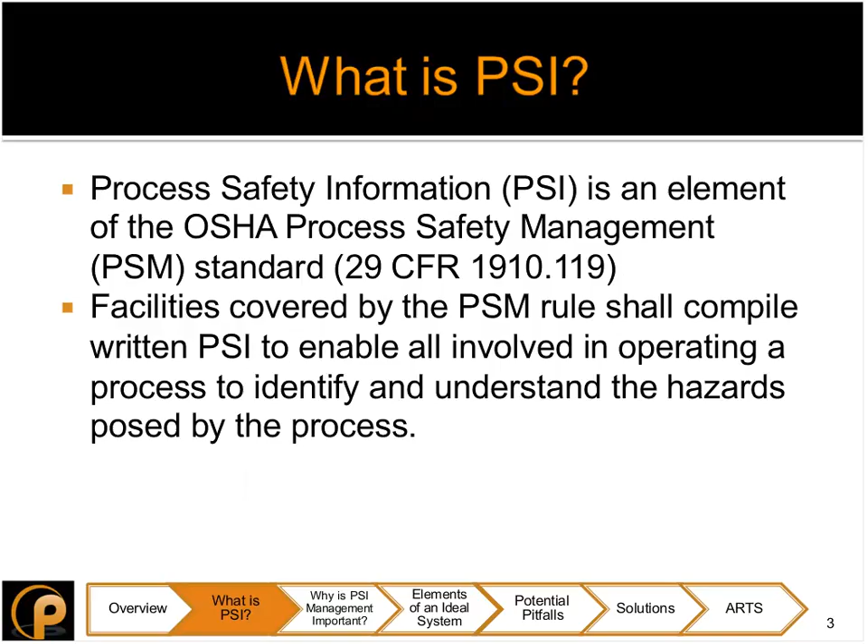What is PSI specifically? So this is how OSHA specifically defines PSI. It consists of information pertaining to the following. The first is the hazards of the chemicals used or produced by a process.

The second would be the information pertaining to the technology of that process. And the third would be the information pertaining to the equipment within the process. So we first consider what's in the process, then we would consider how does that process work, and then finally, what is the equipment that's facilitating that.

So for the hazardous chemicals, we consider things like toxicity information, permissible exposure limits, physical data, reactivity data, things that you would find on a safety data sheet, corrosivity data, thermal and chemical stability data, and the hazardous effects of the inadvertent mixing of these materials.

Then we consider the process technology. So that would be things like a block flow diagram, a simplified PFD or process flow diagram that shows how the process flows from beginning to end. The process chemistry, the maximum intended inventory. What do you keep at your facility? How much of it do you keep? This helps you determine, are you covered by the PSM standard?

It also considers the safe upper and lower limits for items like temperatures, pressures, flows, compositions, and an evaluation of the consequences of deviations, including those affecting the safety and health of employees. And then finally, we discuss the equipment. So we've looked at the chemicals, the technology, now the equipment.

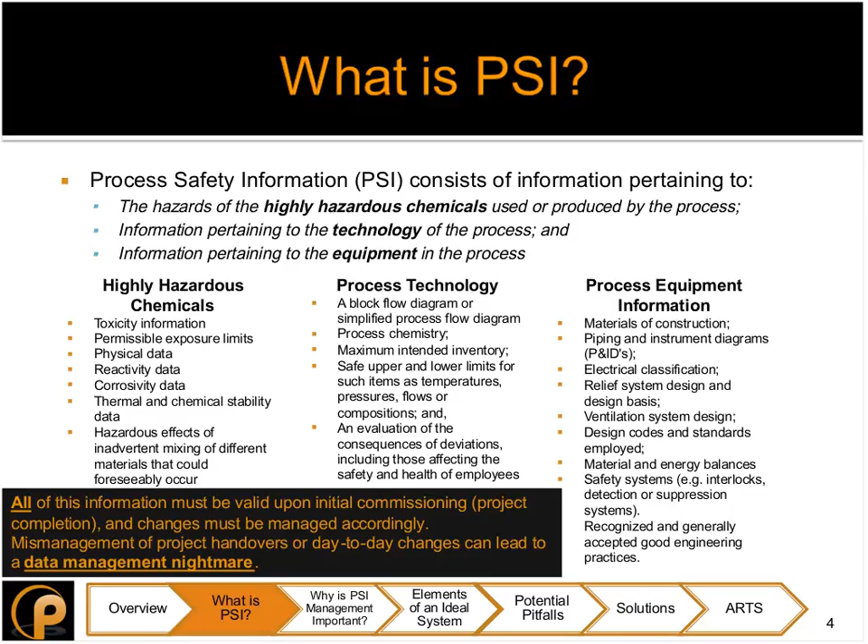So now we'll take a look at PSI as it pertains to a single piece of equipment. So we'll follow this piece of equipment from design to decommissioning, and we'll consider the PSI that's maintained in the data systems, but also in the documentation associated with this equipment. So of course, the beginning of a piece of equipment begins with design. So at that time, you've got systems that manage that design.

You've got design software that's going to contain information. You're going to do an initial process hazard analysis on that design. It's also going to contain some PSI. You may have a relief system database containing different points of PSI. In the documentation associated with that, you're going to have design calculations. You're going to have spec sheets, performance curves, vendor drawings, and so on.

From design, we move into commissioning. So once the design has been approved, we move to commission that piece of equipment. There's going to be not only more data systems, but more documentation associated with it. Of course, we're going to have to maintain that piece of equipment. So we're going to have some maintenance management software. Again, we're still going to continue to have this relief system database where we're maintaining this information now.

We're going to put that equipment on a P&ID. That P&ID is going to contain some data points for PSI. We're going to put it in an inspection database. That piece of equipment is likely going to be inspected for the rest of its life. We're also going to put it in some kind of document management system. So how are your P&IDs managed? How do you manage the documents associated with this equipment? And it's likely going to go on a plot plan for your facility.

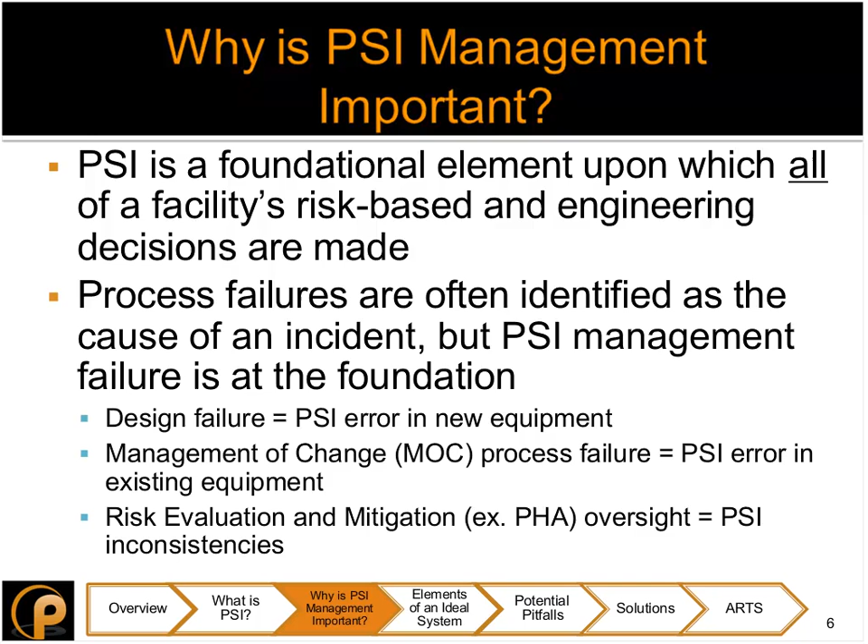To talk about changes in particular, PSI changes must be managed in conjunction with process changes at a facility. So we've hit on this, but let's consider a new pressure vessel. And let's think about all the elements of PSI that could potentially be affected by the addition of a pressure vessel. The highly hazardous chemicals involved in that. A block flow diagram, or PFD, right? Process chemistry, maximum intended inventory, what's going in this vessel. The safe upper and lower limits for temperatures, pressures, and so on. All of these things have to be considered when adding a new vessel.

The materials of construction, right? We need to consider those. We need to document those. It's going to go on a P&ID. We need to consider the effects it has on an electrical classification and update our documentation accordingly. And we need to consider the relief systems for that pressure vessel. It's no doubt going to have other equipment associated with it, maybe a PSV is associated with it. We've got design and design bases that go into that.

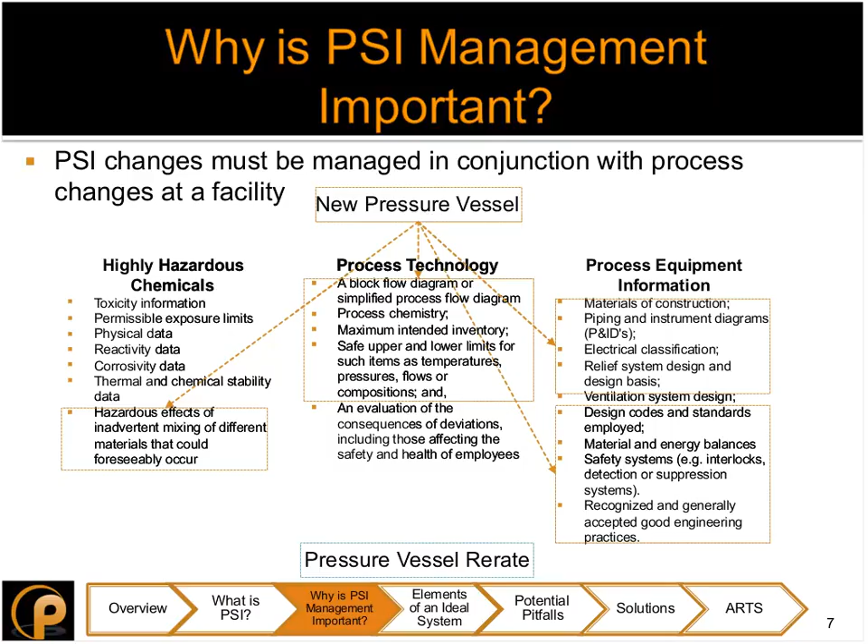So that considers a new vessel, but what about a change, such as a re-rate? So now that we've got a new vessel, it may go through part of its life, and we need to modify it. We need to change it. It gets re-rated for one reason or another. Again, these same systems are going to be affected. We need to consider the changes that has on the PFD. We need to consider the changes that has on a P&ID. Also on the relief system design and the design basis. And the material and energy balances.

So you can see through the management of change process, it could be easy to miss one of these through all of this. Maybe we realized that it changed our P&ID, but we didn't think about the effects that that has on our PFD.

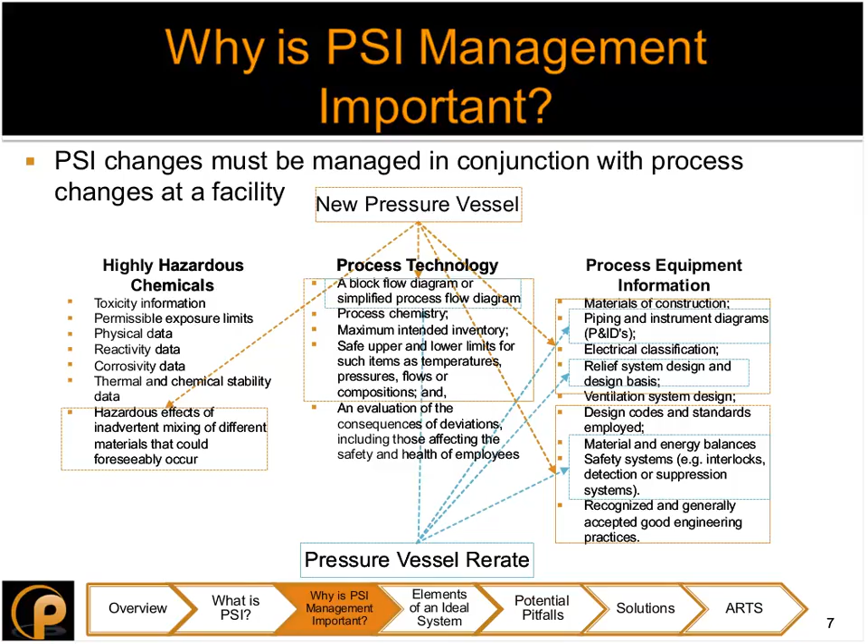So now that we've talked about what PSI is and why it's important, let's talk about the elements of an ideal system to manage that. Really, the two main elements would be consistency and accuracy. We all want accuracy, and we want it to be consistent across all of our systems. So how do we achieve those things?

We achieve consistency through integration. We achieve accuracy through traceability. So integration would mean things are stored and maintained in one location. Traceability would mean we can relate things back to some sort of reliable documentation to let us know that we're accurate. So let's talk about these specifically.

Consistency. Consistency would enable each department system to use the same PSI. This would mean calculations across the board would be based on the same data. We wouldn't have one group basing calculations on a set of data that maybe they maintain that's inconsistent with the set of data that the engineering department maintains. There would be no need to cross-reference systems if everything is consistent.

This would also enable each system to leverage other systems to fill in gaps. So if we know we have a really strong inspection data management system, do we leverage that to fill in the gaps that we have in our P&IDs?

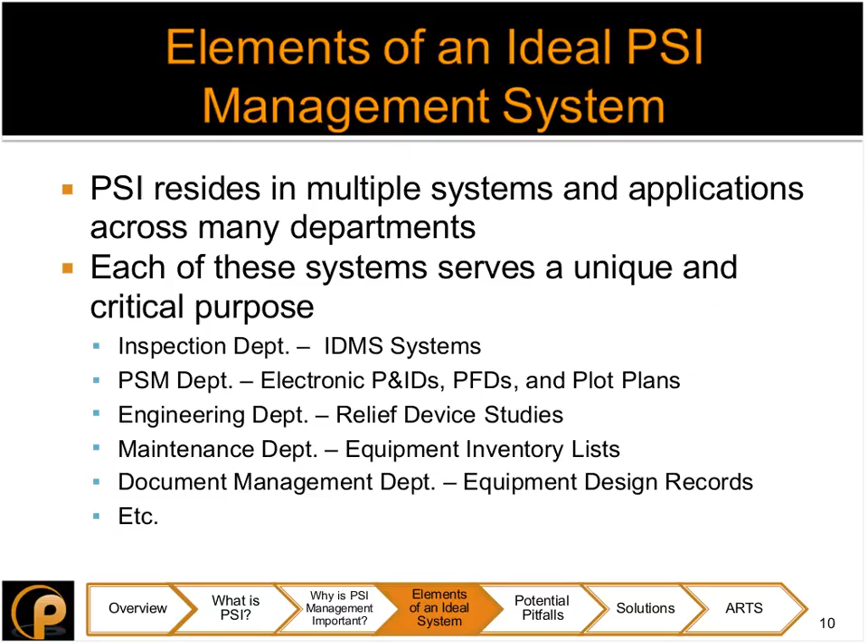So now let's talk about some pitfalls, right? We've looked at what an ideal system should look like. But now let's look at the reality of things and discuss some challenges, some pitfalls that come with how we manage our PSI. PSI resides in multiple systems and applications across many departments.

I'd challenge you to think about your own facility, as we talked about earlier. Where do you manage all of this information? Is it in a central location? Does one department manage it? Or is it in multiple applications? Do multiple departments manage that information?

For instance, you may have an inspection department that has a specific inspection data management system. You may have a PSM department that manages your P&IDs and PFDs and plot plans. An engineering department that has a separate database for doing relief device studies. A maintenance department that keeps equipment inventory lists for maintenance reasons in a separate database. And a document management department that keeps records, potentially separated from all of the data sources we just discussed.

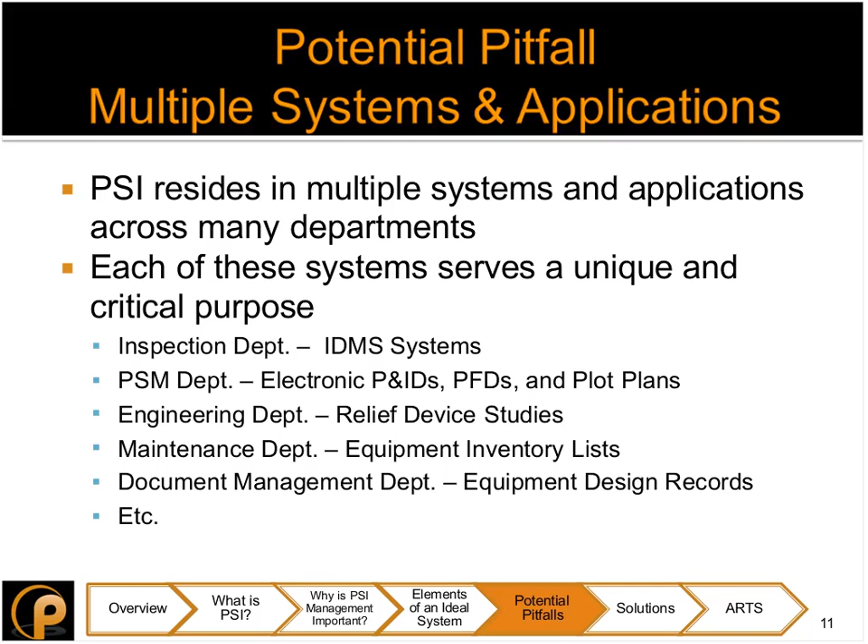Not only do we have different systems, we have different departments. And departments tend to manage and maintain PSI separately. Verified data and information in one system is rarely leveraged to improve other systems. So as we talked about, when we recognize deficiencies in one system, when we make those corrections, do we tie the other systems to that?

Do we make a change to our inspection database and realize we should check our P&IDs also? Should we check our PFDs to see if this information exists here? Or do we focus purely on our departmental responsibilities? If we don't, a number of redundant efforts could be made.

So you could have a huge inspection department effort to update their systems, and then a year later realize your P&IDs are out of shape and have a huge PSM or engineering effort to update your P&IDs. The key would be to recognize these by centralizing your data and only doing these efforts one time.

And again, documentation, which is the source of most PSI, is often maintained separately. So think about your document management systems. Is it maintained with your PSI? Can you get it all out in one location? Can you trace your PSI back to documents very easily?

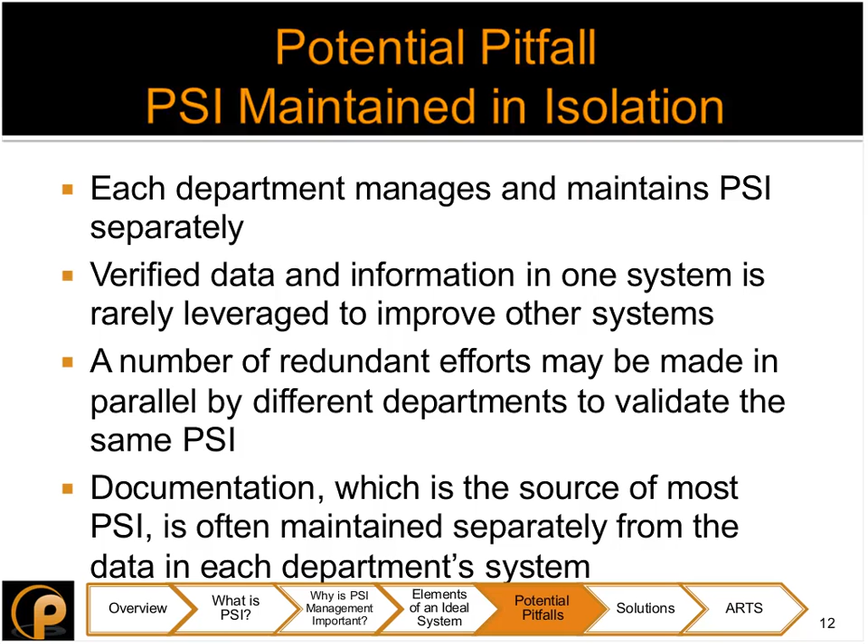And another challenge, whether we like it or not, is human error. Right? Employees are all fallible. Management of change process is not without room for error. This error could come from the improper evaluation by an MOC team of the effect of a change on a particular system. So you may have an evaluation team that recognizes a change will affect a P&ID, but they don't recognize that change will affect a PFD. Or they don't recognize that change affected your relief system software.

Even if you have a flawless team, right, as information goes into those systems, we still have the opportunity for error. Could it be a typo? Could a person see an MAWP of 150 and accidentally type in 120? This happens every day. And it could also be neglect or simple forgetfulness by a system administrator to complete an assignment.

So maybe you have a great MOC system and great MOC teams that assign the right things to the right people, and maybe sometimes an action item gets closed out by the wrong person and never gets tracked by the person it should have to put in the data. Maybe someone with good intentions puts something off till it falls off their radar and gets neglected.

All of these pitfalls and challenges can lead us to a lost confidence in the validity of our PSI. And when we start to lose confidence, we lose efficiency, we lose the ability to design correctly. So if you've ever asked these questions, how do I know every vessel exists in all the required systems? How do I know every vessel's MAWP and MAWT stored in each system is consistent and accurate? How do I know every PSV set pressure stored in each system is consistent and accurate?

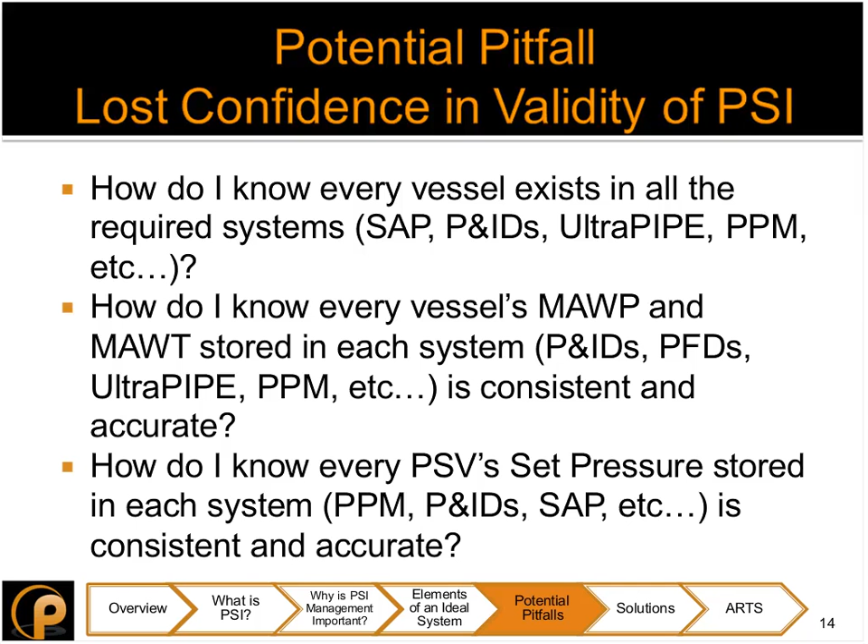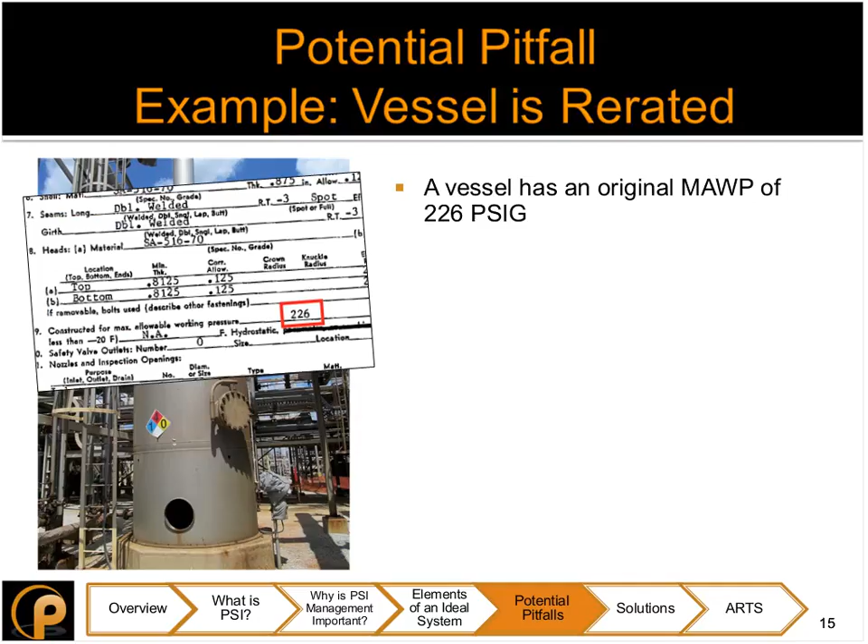An example of the pitfalls associated with managing PSI would be re-rating a vessel. So let's say a vessel has an original MAWP of 226. That vessel gets re-rated to 150. Inspection system gets updated. But the relief systems, for one reason or another, right, it could be any of the reasons we talked about to this point, does not get updated.

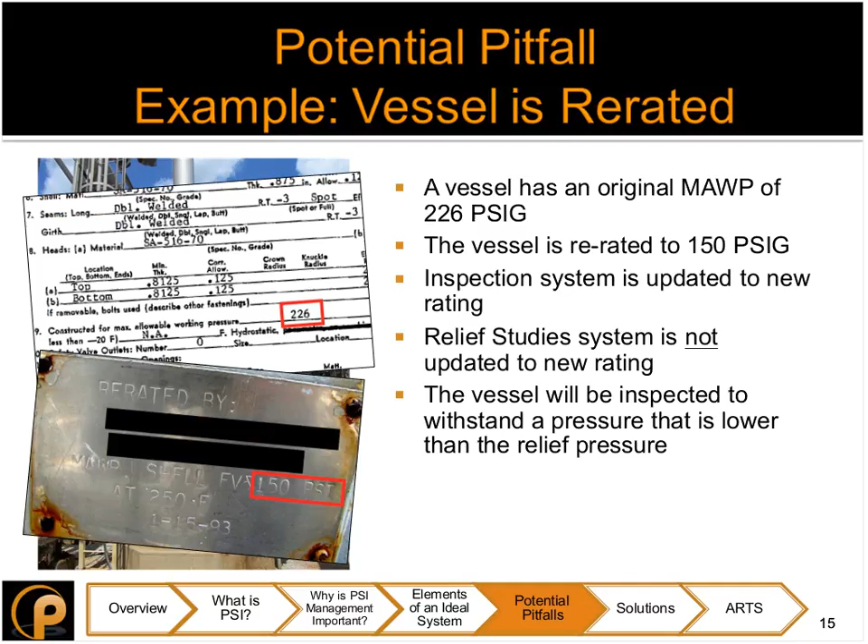Was it a failure in the MOC? Was it a failure by the administrator that was supposed to enter the data? Was it the MOC team? Who knows? It could be any of those things. So then the vessel is going to be inspected to withstand a pressure that is lower than the relief pressure. So PSI discrepancies can go unnoticed if there's not a process in place to connect and cross-check these values.

So now we get to the solutions. We've talked about what PSI is, why management of that PSI is important, what an ideal system would look like, the challenges associated with it. What are the solutions to those challenges? Well, we need to think about our information differently. We need to think about the interconnection between data, documents, and systems.

Data is validated and traceable through reliable documentation. Data systems contain data. Do they contain the documents as well? Are these separate systems? Is there the opportunity to combine these systems? Can we have our documentation available right with our data? Documents, again, are going to demonstrate the accuracy of your equipment data.

And your systems, when thinking about these things, improve PSI maintenance without changing our existing practices. Can we centralize things where we can still update the systems we've been updating, but can we view those systems in a central location that allows us to see, are we doing it consistently without drastically changing what we do?

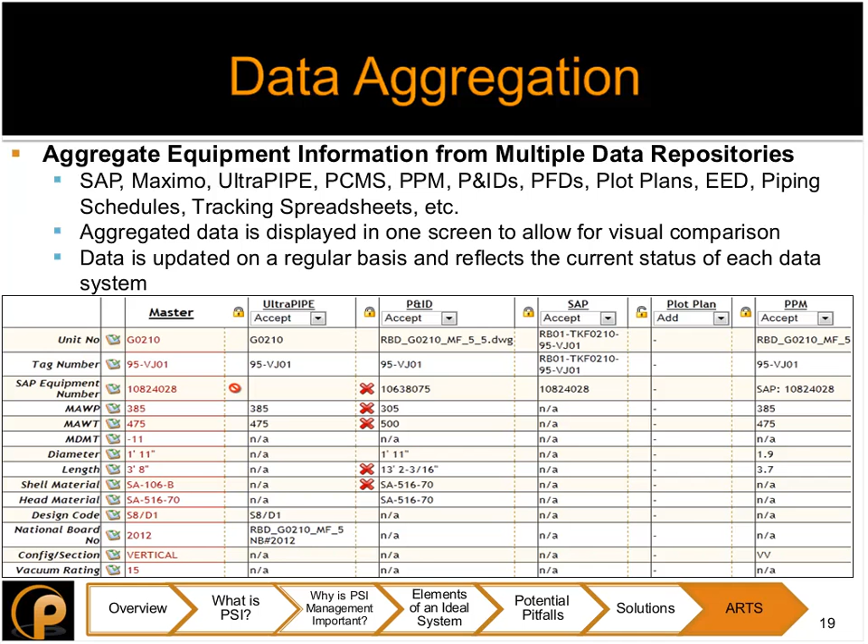And then you can do a data comparison. So you want to aggregate the data to make this possible. ARTS has the functionality to automatically identify some deficiencies, this would be missing records or data, and some discrepancies, so data that is different in one system than it is in another system.

Data can be transformed into a specific format to allow all data sources to be compared equally. So these are some things that are done on the back end, because in one system your data may be formatted one way and another system may be formatted another way. So all of these things make it easier when you pull it in to do some automatic comparisons.

So we talked about data aggregation and comparison. We also want to talk about documentation aggregation. So this is what allows us the traceability that we've been talking about this entire time. We aggregate our reliable documentation, so we are able to trace our data back to this documentation and call it validated. This documentation might include data reports, flow curves, nameplates, and so on.

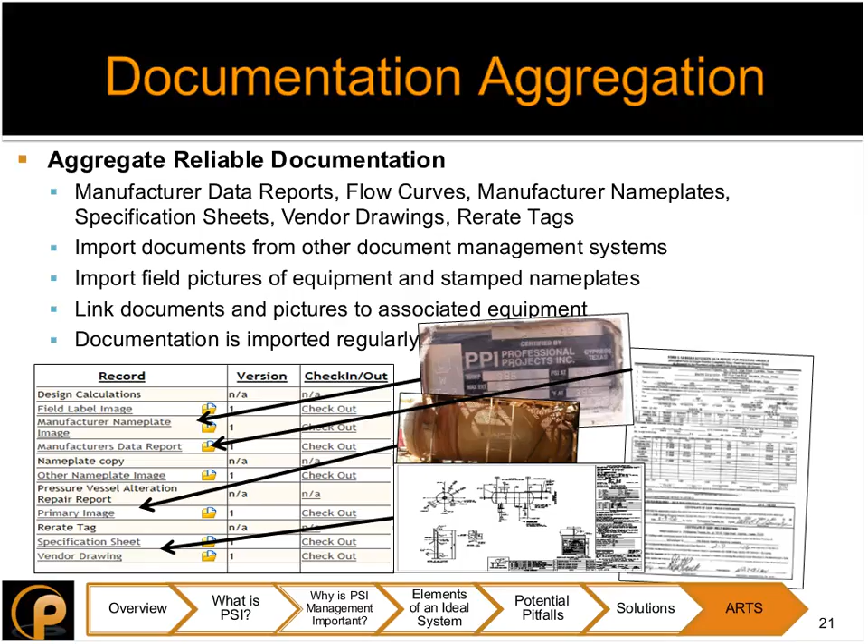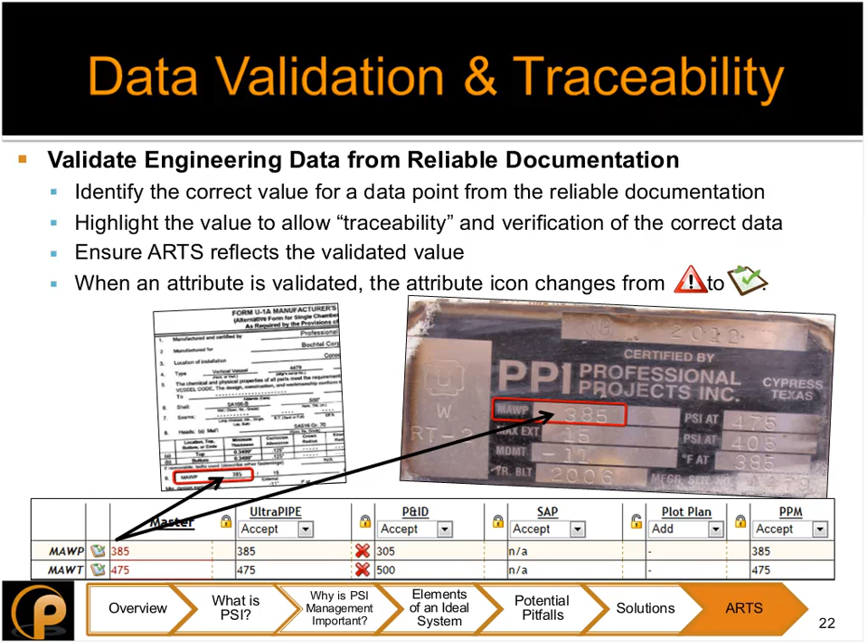And finally, tracking and reporting. So not only do we want to aggregate our data, we want to be able to validate our data, we want to be able to aggregate our documentation to do so, but we want to be able to track progress. So the tracking and reporting functions will allow you to track changes within each data repository. So the equipment itself is inert, but the plant as a whole is dynamic. As data sources update their data, add or remove equipment, discrepancies are created.

So as we manage our change, as we update one system and maybe not the other, these data sources are constantly changing. These reporting functions will allow you to identify trends. Are we constantly updating our P&IDs but missing our inspection documentation? Are we doing a real good job of updating our inspection stuff but we're not keeping our relief systems database up to date? By generating reports on a monthly or weekly basis, you're able to identify these trends.

These reports can include discrepancy reports that show you data points that don't match. They could be documentation reports. What do I have good documentation for, and what am I missing documentation for? Maybe you'll determine we've got really good documentation on our pressure vessels, but we historically didn't do a good job of maintaining documentation for PSVs. These reports will allow you to see that and allow you to think about where your site can improve specifically, maybe put together projects to improve those certain things.

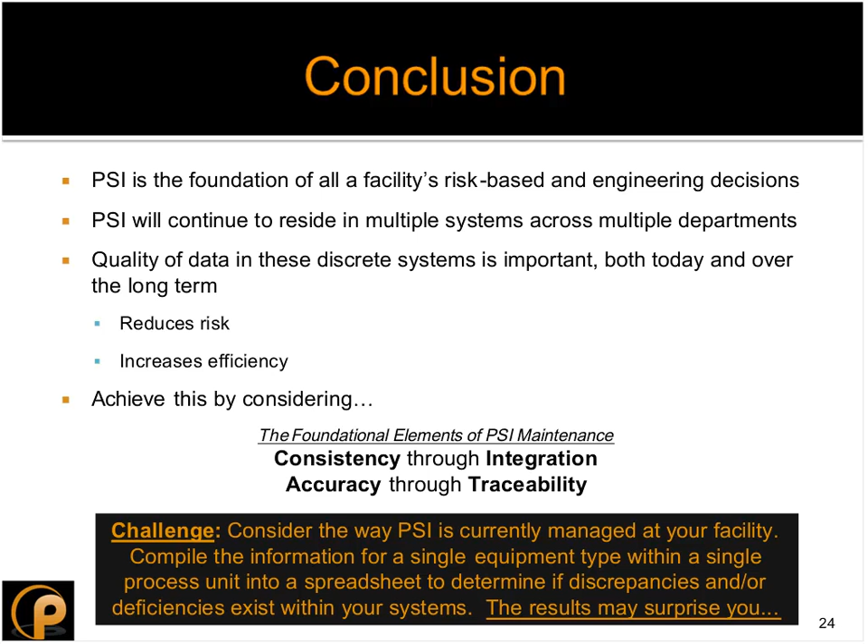Okay, thank you. How do you handle integration in a company that is not operating off the same platform? I'm sorry, could you repeat that? Yes. How do you handle integration in a company that is not operating off the same platform?

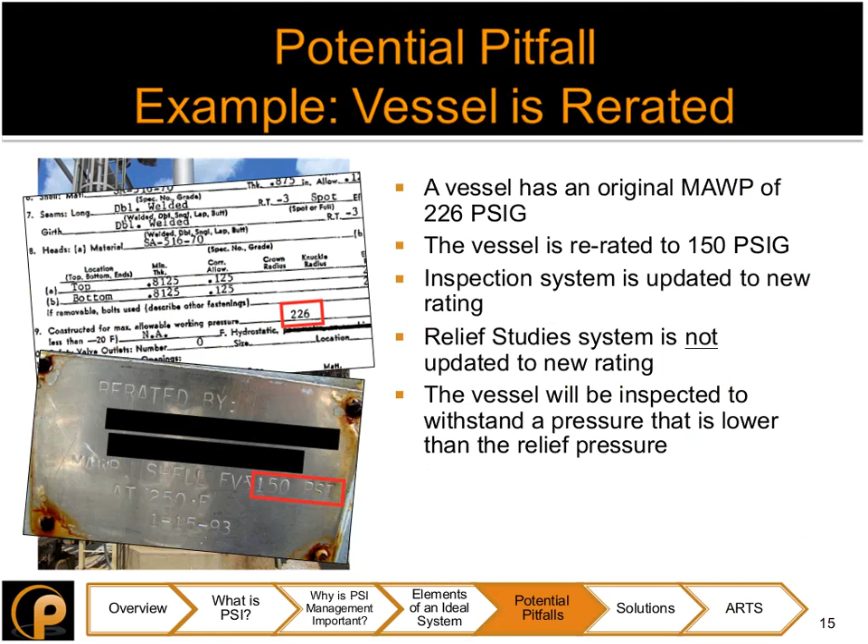I don't know that I still fully understand it, but I would say integration to me is aggregation of data, accessibility. I think all of those things we can make possible, whether it's electronically, whether it's physically. Integration really is just trying to achieve consistency by making sure that everyone in a company is able to see the same information in the same sort of way and make decisions based on the same information and knowing that that information is accurate.

Okay, thank you. For this ARTS system, is there an automated change log generated as this data is updated by any of the departments or connected systems? So within ARTS, you're able to download information from different systems as many times as you choose. So the reports that you can generate can show you things that changed since your last download. So when you generate reports based on downloading information, you're able to see information that has changed from this time to the next time. Okay, thank you.

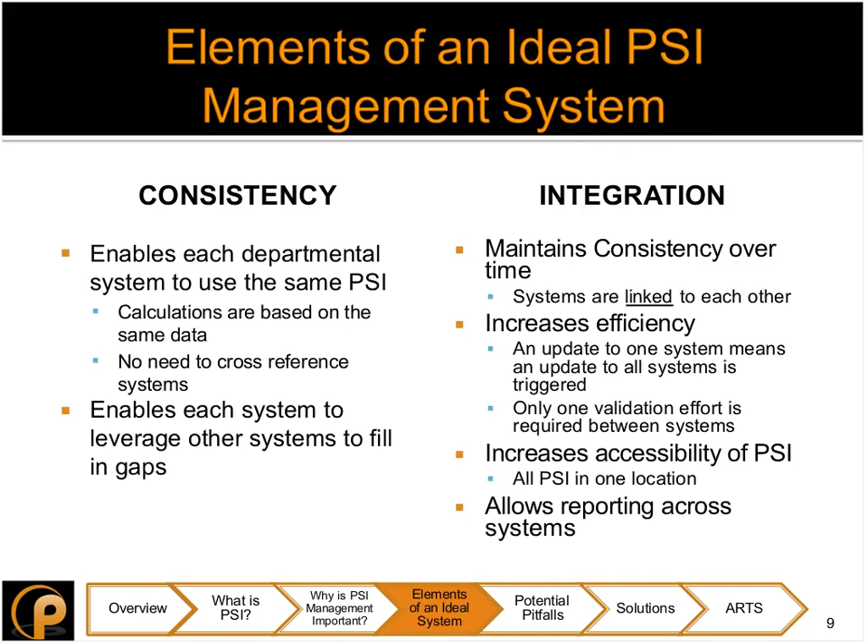Should a company validate all PSI data prior to uploading to the system? Who should do the validation? Really, that's up to the company. The company can decide to do so, but really, while implementing ARTS, that is typically a part of the implementation effort, is to not only configure the system and configure the software, but also to validate the data.

So whether that means having data technicians go through vault files, if it means field technicians that come out and go take physical pictures, really it's up to the company, but it could be done either way. If the company has those resources available to them that are able to go through those files, take those pictures, then that's great. If not, part of an ARTS project could include those things.

Okay, thank you. For this ARTS system, I'm sorry, we asked that already. What is the order of magnitude for implementing an ARTS solution?

The order of magnitude, I guess, depends on the size of the facility and the amount of data that you have, right? There's really 3 phases to an ARTS implementation project. The discovery, configuration of the system, and initial discrepancy identifications. Then you could have that validation effort like we talked about, where you field verify, linking records to each other, and then reporting and resolution, right?

So the order of magnitude depends on not necessarily how much configuration, but how much validation do you need? How accurate is your data? Do you have any idea? Is your documentation maintained in one place, or are we going to need to send people to various locations to find it? I think the order of magnitude really depends on the way that your information has been maintained to this point.